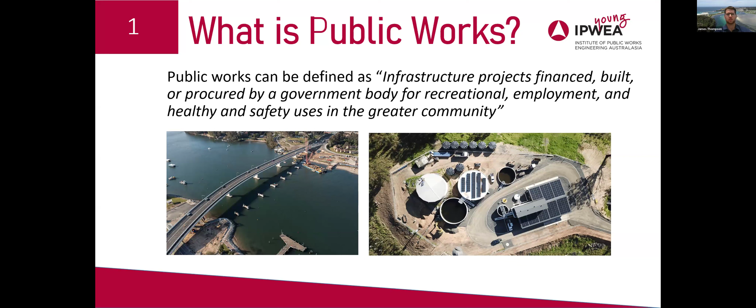First, a bit about me. As Peter mentioned, I'm a transport and stormwater engineer for Young Shire Council. Something many students probably aren't aware of is that I completed my engineering degree at CSU. The reason I did this is it was what they used to call a sandwich degree, designed for industry with a lot of consultation with industry. It worked by having 1.5 years on campus doing full-time project-based work, then 4 year-long work placements while completing university study by distance.

What I decided to do was apply for a cadetship at Young Shire Council, and I fulfilled that role for 4 years as a cadet asset engineer. I've now been in local government for 5 years, with a 6-month stint in Canberra working for the Australian Road Research Board while it was transitioning to the National Transport Research Organisation. I also became involved with IPWEA, and I'm currently Chair of the IPWEA New South Wales Young Committee.

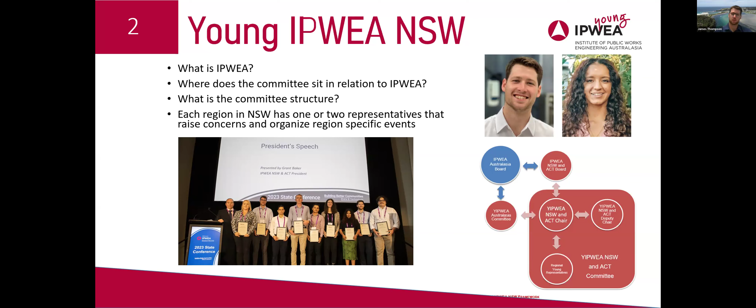What is IPWEA? It's a professional body like Engineers Australia, but a subset more dedicated to public works engineering. The committee reports directly to the IPWEA New South Wales Board, and sometimes we work with other Young IPWEA committees from other states and New Zealand to achieve common goals. The committee is comprised of a chair and deputy chair, as well as representatives from each region in New South Wales. You can see from this diagram that we have coverage across most of New South Wales.

However, there are a few vacancies. If at the end of this session you'd like to know more about what the committee does, how we advocate for public works, and how we develop young engineers, feel free to reach out. Being part of the committee has been incredibly rewarding, and it's provided me with so many opportunities I would never have gotten otherwise. Before we go further, I should describe how I became involved with IPWEA, specifically through attending the New South Wales State Conference in the Hunter Valley.

After getting the cadetship at council, I was fortunate enough to be offered the ability to attend the state conference within about 3 months of working. This was very interesting because when I attended, as someone only a year and a half into their uni and just started at council, I was able to speak and network with world-leading engineers, economists, and risk managers.

This really opened my eyes to what public works engineering is about, and that common goal to improve society and build infrastructure for the community. It made me extremely motivated to learn, and it's something that has stuck with me ever since - it's the main reason I became involved with IPWEA.

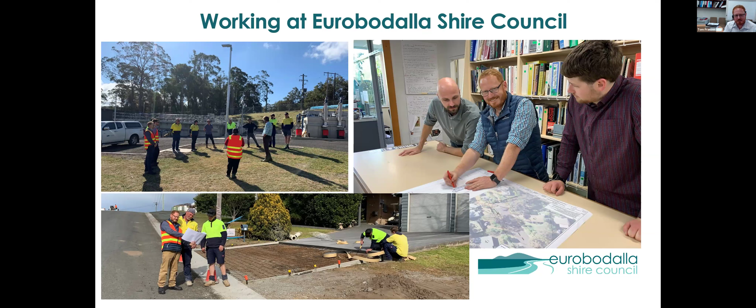As I went along, I went into project management for a few years and delivered some streetscape upgrades and roundabout treatments. This one here on screen at Narooma, on the south coast of New South Wales, was a $4.6 million project.

It can be wide ranging. We've got opportunities in water and sewer, development engineering, design, transport, road safety, asset management, and the list goes on. As you get more regional or remote with the council you're working with, you tend to be a jack of all trades in rural and remote councils.

There may be one or two engineers and you look after a whole range of things. But as you move towards the more regional and then metro councils, you may be very specialised in what you do. I've been lucky to get the best of both worlds in a regional council. Obviously, the scale of things we do is quite significant, but we still have that breadth and depth of projects.

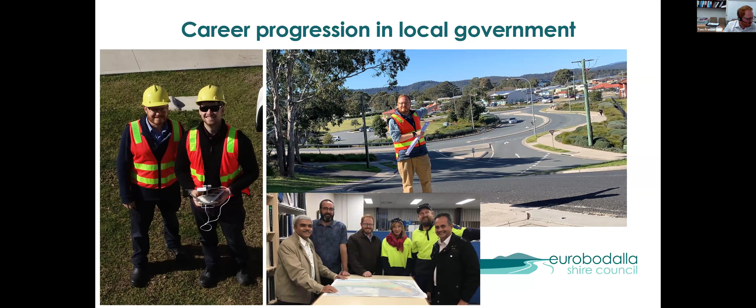I then took up the opportunity to be a full-time design officer at council, and was able to then further my career in more complex but rewarding projects where delivering road safety upgrades, delivering intersection improvements, designing roundabouts, and a whole breadth of different projects and experience that I'm happy to discuss and share with you in any of the questions.

As I mentioned before, one of the key aspects I think that local government and public works engineering enables you is to get that work-life balance correct. And that's very important. I found as I've become older, looking back, no longer a young engineer anymore. I'm actually about to turn 40 this year, and I think looking back on it, it's those connections you make with your work colleagues and your friends and work outside of life that your career doesn't define you. You need to create connections and have those support networks, such as through IPWEA and other things.

I've been a member of the social club here at our local council, done heaps of different events. Had the opportunity to be involved with the Unearthing Leaders program that our council offers, first as a participant, but then as a mentor. And it certainly is an honour to see people develop. I've also been a mentor myself with various design officers and young engineers. It's certainly a privilege looking at James and watching his career development. It's very much an honour to see him flourish in the engineering field and all the things that he's got to look forward to and that he is achieving.

So I'll just now talk on some of the projects that I've worked on and go into a bit more detail around that.

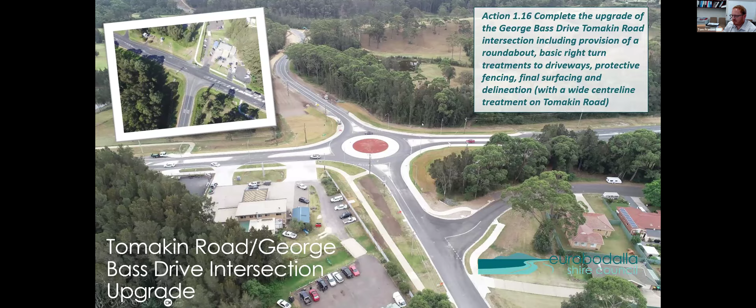One of the things that we've experienced since 2019, 2020, and we're probably not alone with this, certainly much of the south coast of New South Wales and Australia in general, is the sheer amount of natural disasters and the increased frequency of those disasters that have impacted us. The Eurobodalla was severely impacted by the 2019, 2020 bushfires, plus I think it's now 13 declared flood events following on from those fires, which has devastated our community, left parts of our community isolated, and where we've had to work to rebuild a lot of our infrastructure. Since 2019, 2020, our council has undertaken about $46.9 million of infrastructure restoration works, with another $10 million in works left to go.

One of the projects that I was fortunate to be involved with was an alternate route around a landslip on one of our rural roads. This had left our community isolated, and under the natural disaster recovery arrangements, councils can get funding through other levels of government to fix infrastructure like for like. So pretty much what they offer is, you can't improve the infrastructure, you can't better it, but you can replace it in the condition it was in. This proved challenging with this landslide, where we were potentially able to fix up that landslide, but we had the assessment and the geotechnical studies showing that the surrounding areas were also at risk of failure, and putting people in that space, fixing it up, would be severely risky to both their personal safety, plus also the future sustainability and resilience of the road.

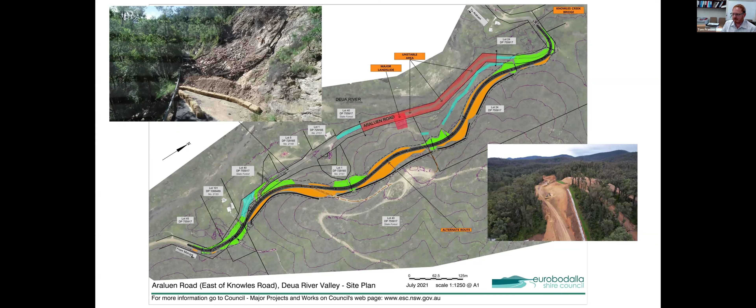One of the things that has been important for me in my career is finding ways to be a decisive leader, but you've also got to make sure your decisions are based on core values. So you can't be wishy-washy in what you do as an engineer, and especially as a manager, where you're expected to make many decisions every day. What I find is if you make those decisions based on core values, when you look back, they're often going to be the correct decisions because you've got your core values at heart.

Some of my core values are safety, quality, integrity, sustainability, resilience, collaboration, and excellence. But at the top of the list for me, and certainly aligned with our council's principles and many other organisations, is safety. One of the key ones we work on in the transport network is the safety of not only our people and our workers, but the safety of the community and a safe systems approach.

Unfortunately on New South Wales roads, one person is either killed or hospitalised every 50 minutes, and that's just not acceptable. Going forward, we've got a vision towards zero, reducing fatalities and serious injuries, and that involves not only looking at who was at fault in a crash, which was the previous approach, and trying to look at behaviour, but looking at what we can do as a system and a systems approach to making improvements. That includes safe roads, safe speeds, safe people, and safe vehicles.

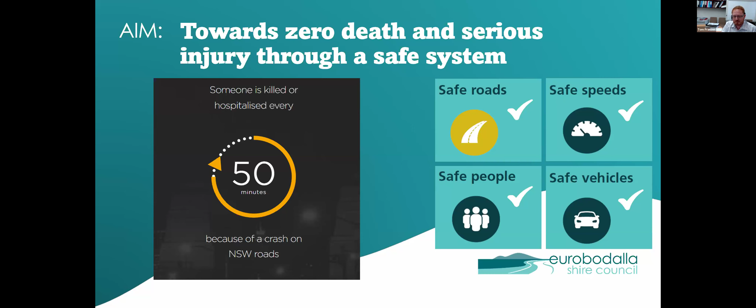We have a role to play in all of those in local government. But one particular thing we can focus on is safe roads, creating a safe road environment where people may make small mistakes, but they don't get penalised for those small mistakes on the road network.

Another thing I'll touch on is moving from working on individual projects, which as a project engineer is what you look at. But as a manager, you've got to look more holistically and try to look at network-wide improvements and align multiple project objectives. Often there's funding available for road safety, or for capital upgrades or renewals, but they often don't align with one another. And we've got a whole suite of just under $100 million worth of capital projects we deliver every year. It's trying to find where those projects make most sense to deliver efficiently.

Sometimes coming up with road safety outcomes, if you tried to progress them singly focused, it would never get done. But often as an engineer, you look at where we can leverage other opportunities to maximise the output for our community and the benefit of a particular project.

This one project in mind was a realignment of a road that had a series of bends with a serious crash history. Basically we're realigning that to a straight alignment, improving the intersection upgrades, improving public active transport connections, shared pathways, lighting, and general alignment.

But what that created was a whole heap of cut. So in our earthworks, we had an imbalance where, to get this safe road alignment, we're creating a whole heap of material. Historically, that may have been placed in a stockpile somewhere and used later, or worst case, taken to landfill. But in the new way of looking at things we try to do here at council is, where can we recycle that material to get other benefits across the network? So on this one site, I think that material was taken to 5 other locations where we identified road safety upgrades for widened shoulders, flatter batters, and the like, where we could utilise that material.

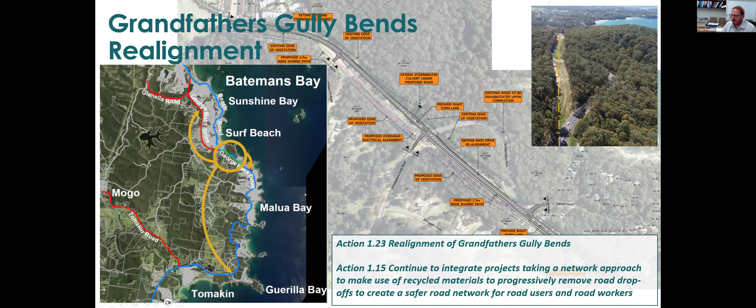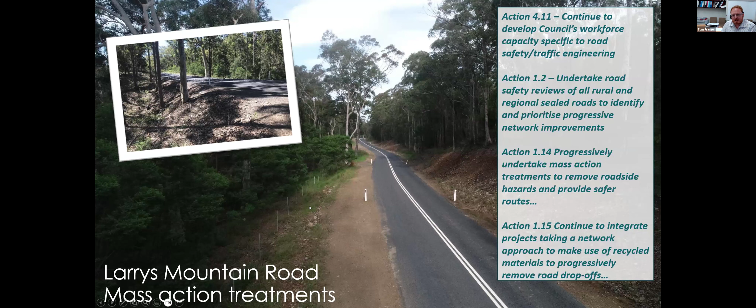This is one of the sites where we'd previously identified there were some hazards next to a rural road. There wasn't much shoulder on the road. It was serious high risk for the community, but identifying that and not having the money to do anything about it, often we're resource constrained in local government, and you have to be innovative and come up with solutions to these problems. We were able to recycle that material to provide a benefit rather than just getting rid of material.

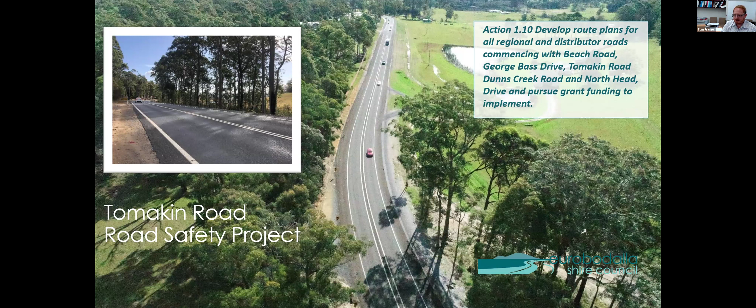Also, one of the aspects I try to look at is thinking network wide rather than individual sites. Previously there were a lot of black spot funding opportunities where they'd fix up a curve, but what happens is it sort of transfers the risk to the next site. What I try to think about now is holistically and route based, trying to get a consistent safety standard for different key routes. That includes wide shoulders, wide centerline treatments, safer batters, better line marking and delineation that's consistent and self-explaining for the driver.

So in summing up, I guess what I'd say is there's many opportunities in local government and rewarding careers in public works. You can live and work in the location that you like, and you can actually have real benefits to the communities that you work in, and you can see those improvements. Some other jobs you might not see that for 10, 15 years, but here you'll do a project one year, the design, investigations, planning, and the next year you'll be delivering that and seeing the outcomes. It's a very fast-paced environment, but very rewarding. You're able to develop those skills with a lot of different experts and professionals along the way, and you can work in those regional areas.

So my question to everyone here is, where will your career take you? I guess the sky's the limit, and never say never, because with my career I've made a change and I've been quite successful. I've had a rewarding career, pivoting what I wanted to do, and this is my passion. I love what I do, and I love what we do for the community. So I'll take any questions at the end. Thanks.

We delivered over $5 billion worth of infrastructure. It still blows my mind it was that large last financial year, but we responded pretty much after the bushfires that we had in 2019, 2020, then went straight into 2 years of flood recovery. So that has certainly lifted the amount of work we have had to manage in the last few years.

We delivered 1,900 projects. To give you a bit of a view of that, I won't go through projects all over the state, but just some examples of the diversity of projects we deliver.

Sorry to interrupt, but I think you might be sharing the wrong screen - on my view I can only see the front page, the regional infrastructure overview. Can you see the map? No, which bit are you looking at? Just the overview, the blue screen regional infrastructure - it's got the outer border of the whole PowerPoint, it doesn't actually zoom into the individual slides. How's that one, got the map? No, still not yet, one second. How's that? Yes, that's it, we got the map now.

Excellent, thank you. Excellent. So let me just go back to a couple of little screens.

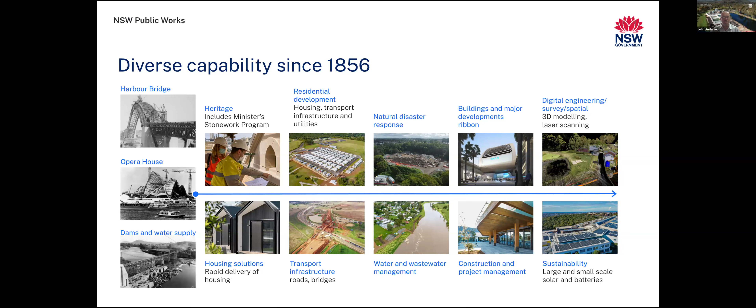In terms of the types of projects we do for state and local government agencies, here's a few that I will flick through quite quickly, as there's quite a lot of project examples.

Landslips, similar to what Eurobodalla has encountered - there's been plenty of project failure up and down the dividing range, and responding to those in a timely manner has been a focus of ours for at least the last 5 years.

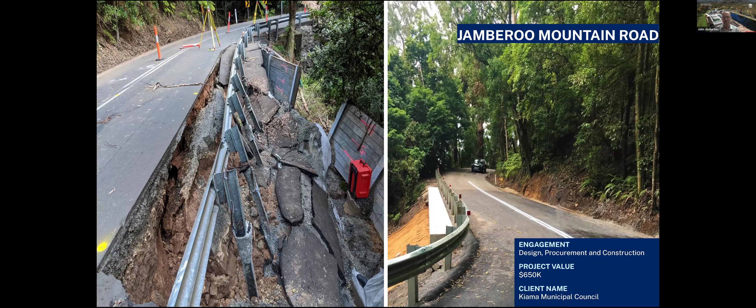Some larger projects - $85 million for Wollongong Council. We've provided project management support to Wollongong on this large road connector that connects, as you can see in the distance, the land release or future land releases of West Dapto and further south. Having flood-free access in and out of that area was essential for the council.

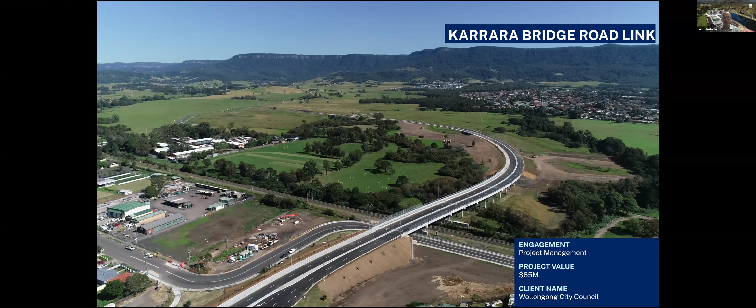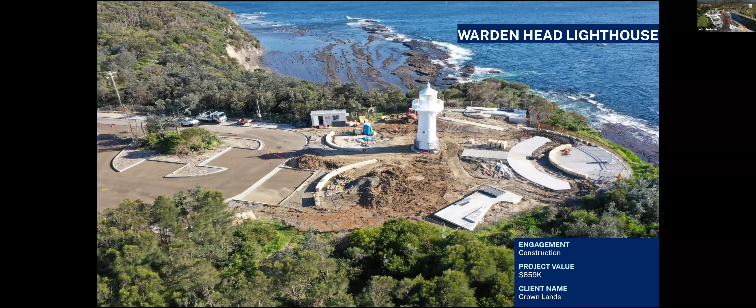Working on things like coastal headlands, Crown land, very sensitive sites for Aboriginal communities, delivering improvements to the facility. Major projects including special activation precincts, which the government is now investing hundreds of millions of dollars in across 4 locations - Parkes, Moree, Wagga Wagga, and the Snowy region. We are involved in the delivery of those major infrastructure assets.

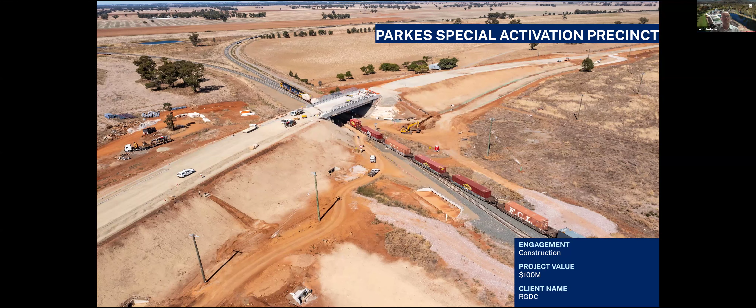More failure, not a great project for a council sadly, but again through more landslips and wet weather events, this creates significant challenges to certain road infrastructure. We've been brought in by Transport for New South Wales to assist them in the rectification of this section of road.

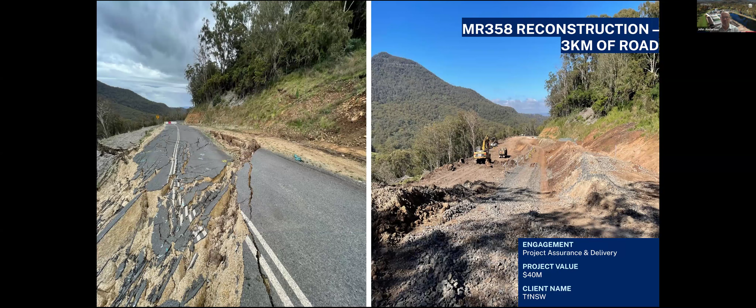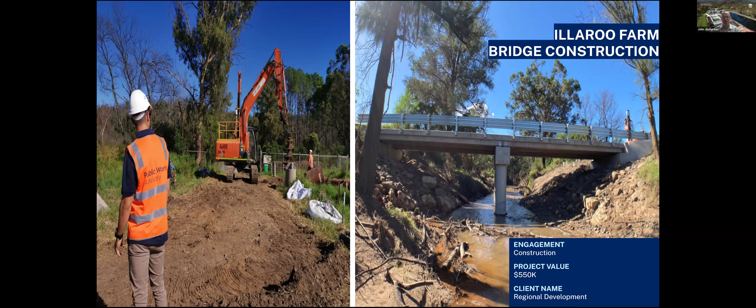Bridges - a lot of work has happened on bridges. Forestry had a lot of timber bridges that they had lost in the bushfires, so they've now asked us to help them replace some 15 of them.

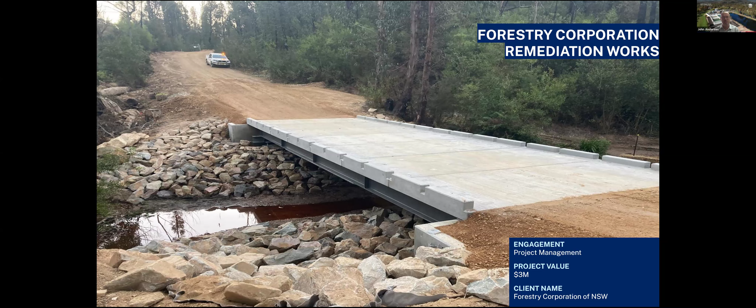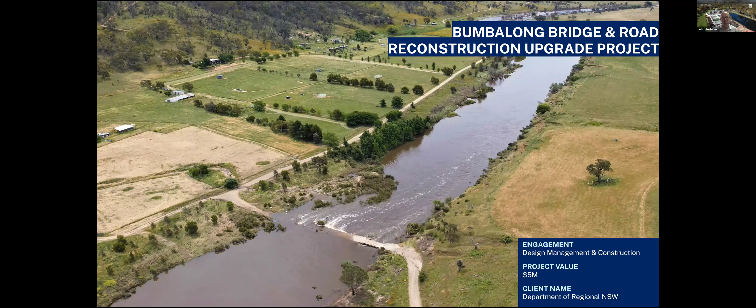You'll love this photo. For those of you that want to see bad engineering, here's clearly an effort to build a bridge underwater, crossing the Murrumbidgee River just south of the ACT. The state government's now going to replace that structure, if you want to call it a structure, with a new bridge, which is quite a challenging site, particularly with lots of interested people in the community wanting to know how we're going to go about this.

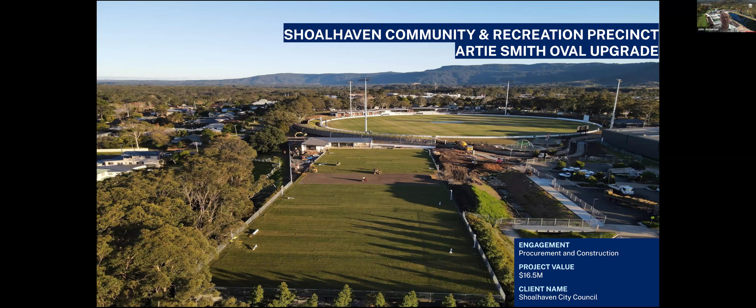A sporting facility for Shoalhaven. This was a large $16.5 million major refurbishment and conversion into a regional sports precinct for the Shoalhaven, based in Bomaderry, that's recently just been officially opened.

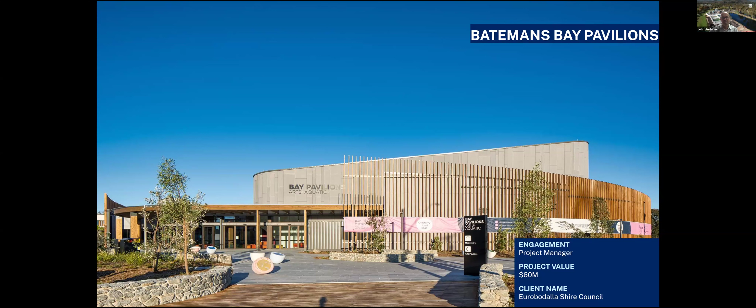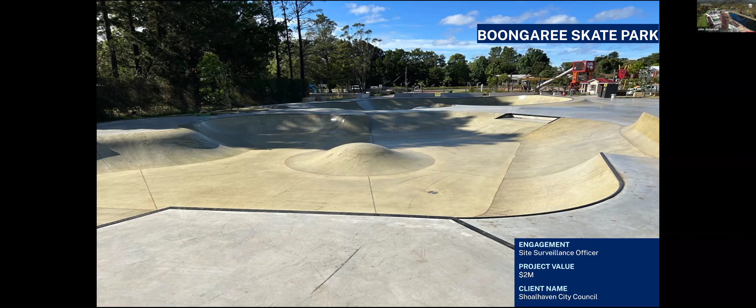And in the more modern setting for Eurobodalla, the $60 million bay pavilions, a combined aquatic centre and performing arts space - a fantastic project. For those young at heart, or certainly of age, the more frequent skate parks - a fantastic bit of engineering, certainly very valuable to the community.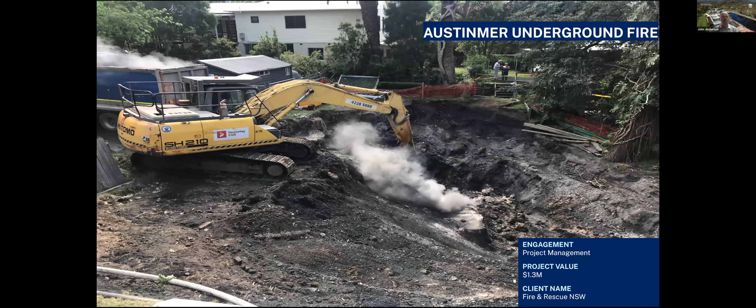In the environment and waste space, waste transfer stations - we've built many of those in recent years. Complex underground fires - please do not go trying to burn out the tree stump of a tree where it has been planted on historical coal wash. You're likely to start a combustion process that is very expensive to put out.

The only way was to excavate this out, very challenging both in terms of site access and environmental conditions. Some damage to a landfill cell that then had to be restored, but landfill cells are something we've built quite a number of in the last few years - probably in the order of about 10 landfill cells.

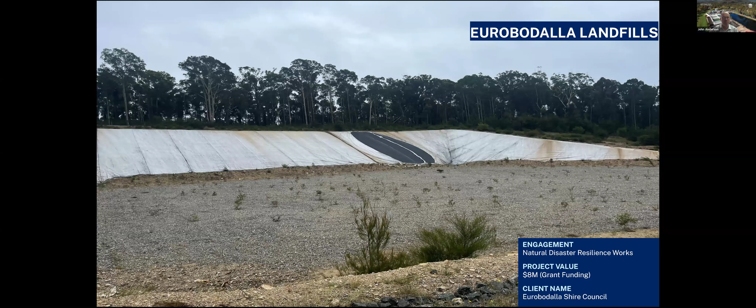Aboriginal land cleanup post the bushfires - lots of damage, lots of debris, lots of asbestos. That's been an ongoing body of work we've been doing now for 3 years, and continues to surprise us with the amount of work and the complexity of working in those environments.

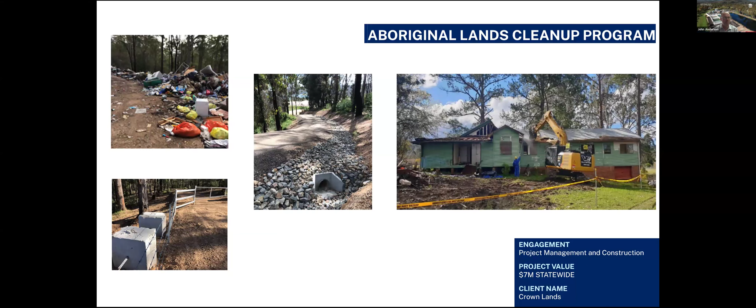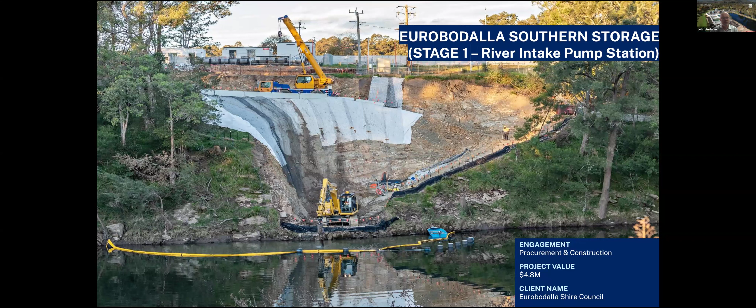The forte of Public Works, water and wastewater. This is a river pump station we constructed for Eurobodalla, which feeds water to an off-river dam currently under construction in Eurobodalla for $130 million - a fantastic project, a collaboration between Public Works and Eurobodalla Shire Council. Cannot commend you enough if you get a chance to go and look at a project like this. They're not built every year, so certainly worth a look if you get a chance to visit any of those types of sites.

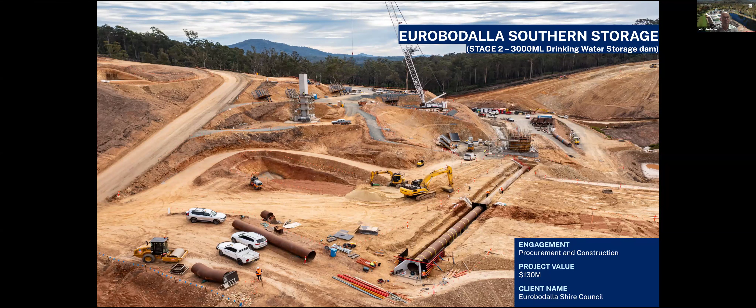One that was more recently done a few years ago is in the Cooma area in Nimmitabel - the completion of one of the first dams built in New South Wales in something close to 20 years. So they're pretty rare, but certainly fantastic to work on.

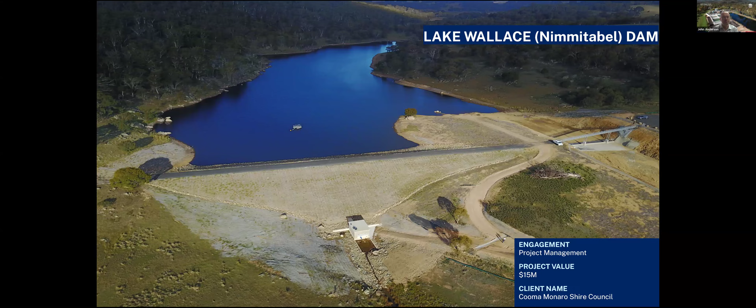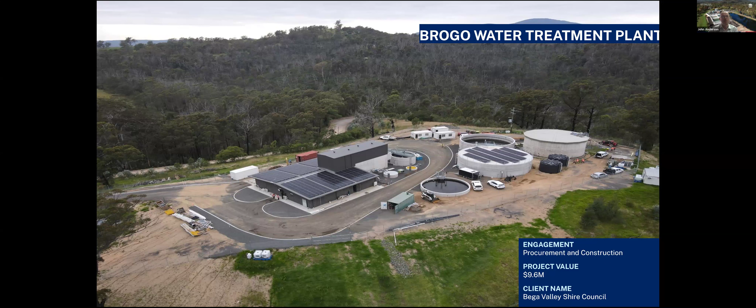Water treatment plants, certainly the flavour of the last few years for Bega Valley Shire Council. We've assisted them - they've been a blended team of their resources and ours. That's been one of, I think, 4 in total that they've had constructed in the last couple of years.

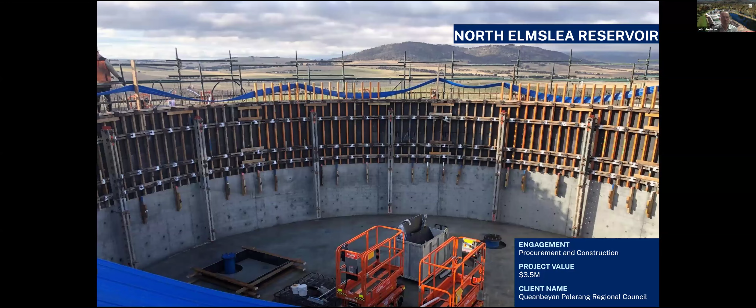Recycled water, reservoirs, pump stations, more sewage treatment plants, more reservoirs, and a very interesting and complex site: a directional underbore.

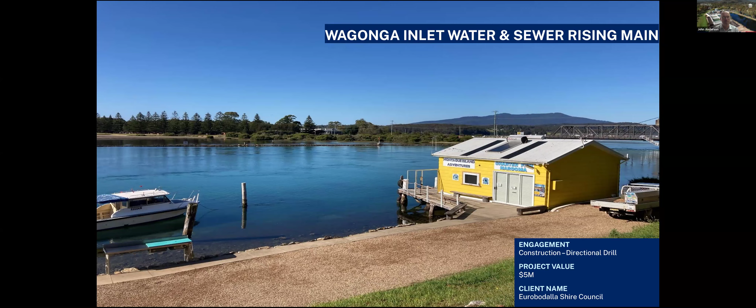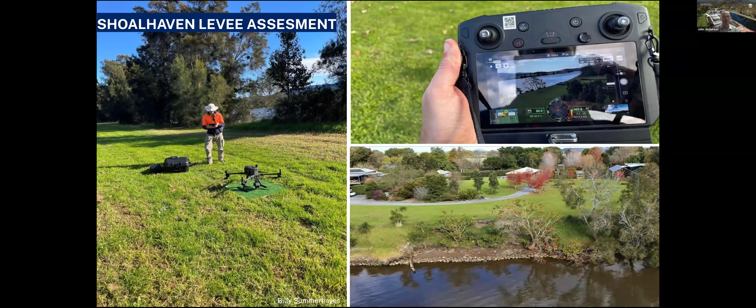As you can imagine, a very sensitive environmental space in a natural inlet. We've done a couple of these. They're specialist contractors required to do these types of works. Just a little update for those not yet involved in surveying and spatial services: modern technology has certainly changed the way surveyors work nowadays, with drones, LiDAR, and a range of photogrammetry techniques. As an example, we went to the Wollongong cenotaph and did a full 3D scan of the site, generating a 3D model of the cenotaph itself.

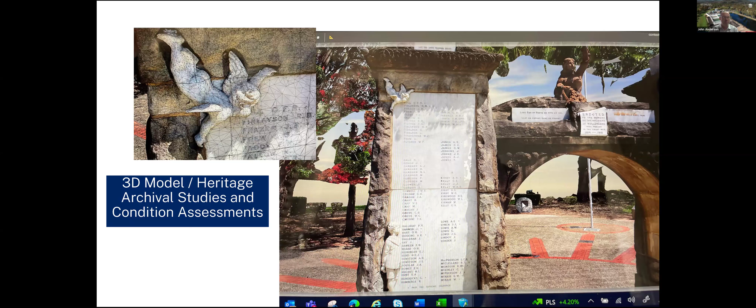And then you can really zoom in on these. The absolute quality is phenomenal. From an archival perspective, if this was ever to be damaged, it can certainly be rebuilt. From a maintenance perspective, it's easy to naturally understand the maintenance requirements of a structure. You can zoom around this, zoom in and out, rotate it, twist it, do what you need to, and get practically as-built down to the millimetre. It is phenomenal new technology.

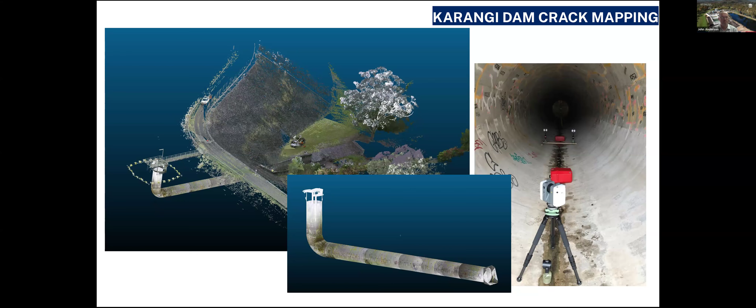Making sure that your dams and your assets are very stable. Precision monitoring is something we have done for many, many years, but slightly different to perhaps what you think is a traditional surveyor's role.

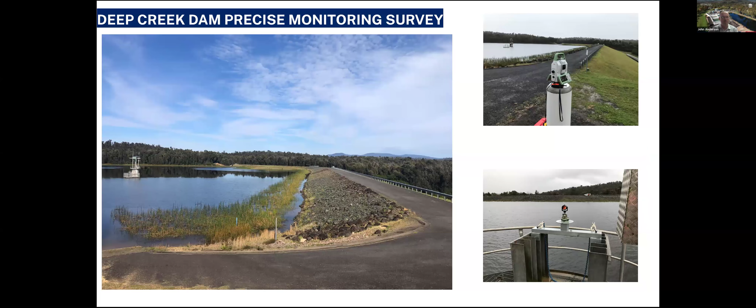3D models of Tomakin STP. Again, these are not photographs - these are 3D models done based on scans. We're certainly finding that the progression of things like BIM modelling for asset management in the building space has definitely moved well and truly into 3D design in the civil space, having the ability to see and navigate your way through a project in the design before you build it - something we're actually going to put at the IPWEA New South Wales conference.

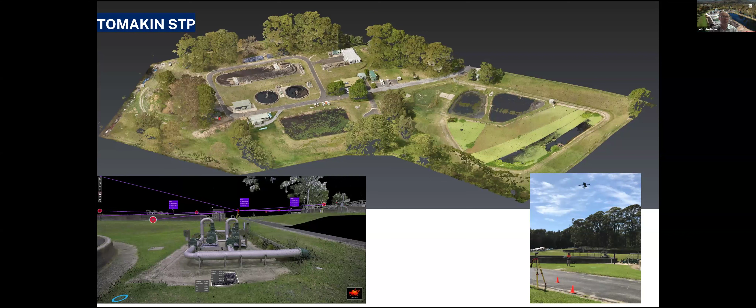One of our guys will be turning up to that event to demonstrate some of that. So if any of you are lucky enough to go to the conference in the Hunter Valley, I certainly commend you to go and put on the 3D goggles and play around with it.

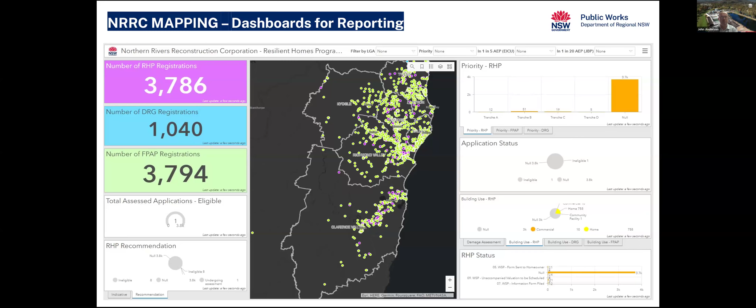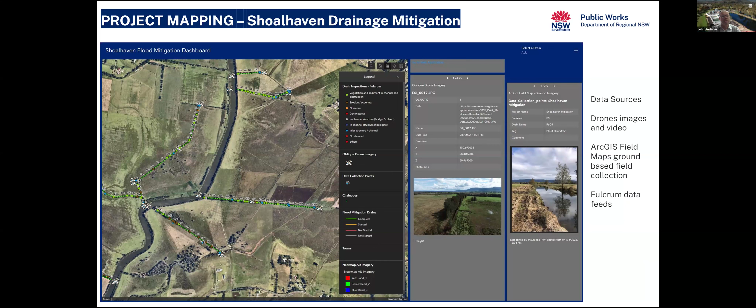More GIS issues for mapping floods in the recent floods in the Northern Rivers. Here's a map - you can see quite clearly identifying all of the properties that registered they were impacted by flooding. And again, producing GIS portal data for similar things in drainage mitigation, levees, and so on. So certainly it has moved into that space. Yeah, certainly an introduction to some of the projects we've been delivering. I hope that was beneficial.